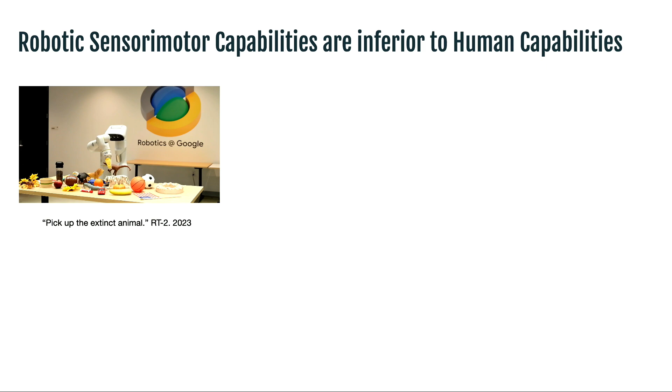But what I want you to pay attention to is actually how simple the grasping action is. It's still a very simple pick and place task. This video is sped up an undefined amount, as you can see by the light flickering in the neck of the robot. This is very simple still, and I think one of the main things we're still lacking in robotics is really not comparable to the kinds of things people can do.

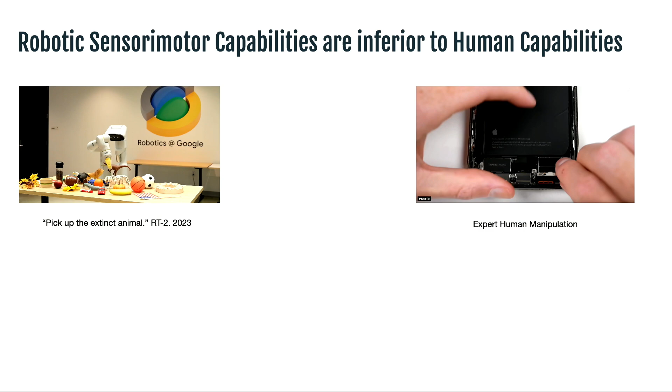Here's a random YouTube video someone sent me of someone repairing an iPhone, trying to take out splintered glass from it. You can see how interesting the manipulation actions of this person are. They are using tools, really prying out things using levers, and there are minuscule screws that this person loosens and all of this. It's a very intricate manipulation problem that we are super far away from solving.

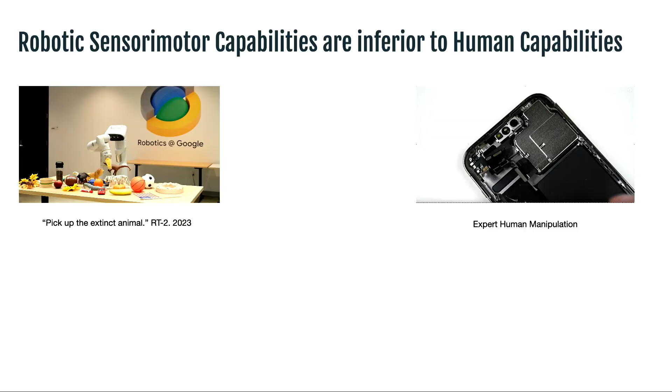Even if we ask a robot to handle comically large tools and comically large screws, I don't think the robot would be able to do it. Here it's even more than that - it's not just tool use, it's also this precision that robots don't have. Robots are not yet able to do this widespread range of everyday human manipulation tasks. This is an expert human, so maybe I'm not even able to do that, but this I would really like a robot to be able to do.

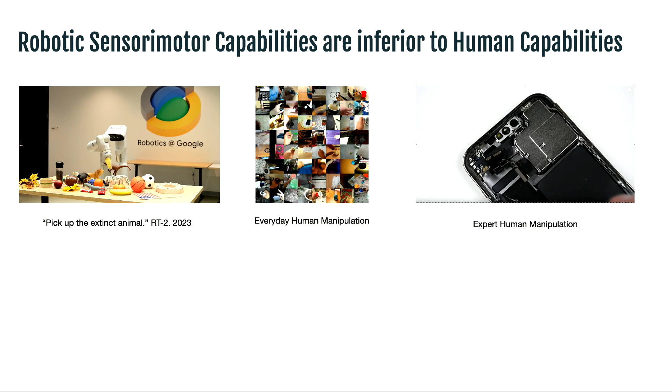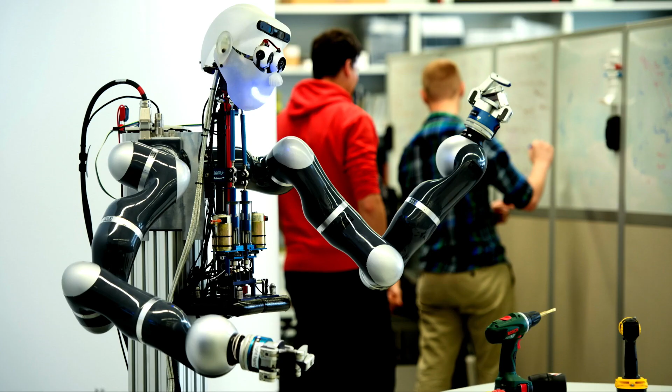A lot of people in the community are asking if we can also have a robotics foundation model that, similarly to NLP and computer vision foundation models, could actually do things they are not necessarily directly trained on, and have zero-shot generalization, especially over different objects, different environments, different embodiments, and of course all these different tasks as well. So what is a robotics foundation model? What exactly would that be?

One way is through dynamics modeling, or how people call it now, world modeling - it's just another term for it. That's a function that takes in actions and past observations and predicts future observations somehow - that's a world model, a dynamics model. Or you could directly learn the policy: take an observation and a goal and output an action directly. These could be ways to implement this foundation model.

Another way is to do inverse reinforcement learning, to learn, given observations and actions, a reward function. Then you have either an optimizer or a reinforcement learning method to learn the policy given this reward function. So what is different between a robotics foundation model implemented in any of these three ways and a foundation model in the area of NLP and computer vision?

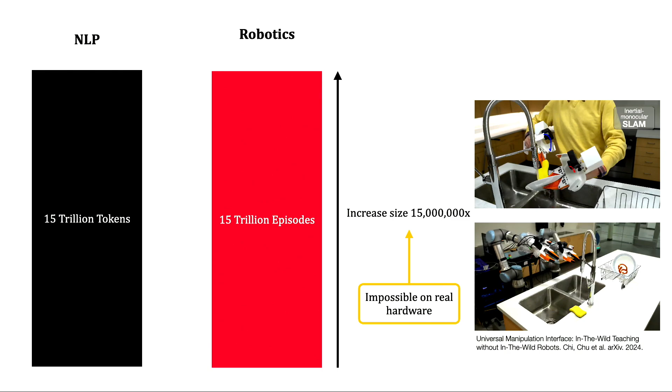I think here's some more ways on how people try to scale up data. Like this, you've probably also seen, this is the universal manipulation interface from Shuran Song's lab, where they have this handheld gripper. And that's, of course, way easier to transport around than a full robot. They basically collect this data, they have this GoPro or iPhone here on the wrist. And then they can train a diffusion policy on it, and then this robot basically tries to do the same thing, in this case, cleaning this plate.

So that could be another way, versions of this on how to scale up this data, because clearly, I think personally, from my experience with this model and trying it, I do think it's very promising to scale up real data in some way.

Which brings me to other ways on how to scale up data. We could, of course, also use simulation, right? I think I had already a bunch of conversations today where people asked me, what do I think about simulation? And personally...

I'm like, every time one of my students touches simulation, everything takes two times as long. And sometimes I'm just like, maybe we should just use a real robot all the time. But I do think simulation has its place, and there's probably a lot of scaling up we can do without spending this painful robot time, and instead spend painful simulation time.

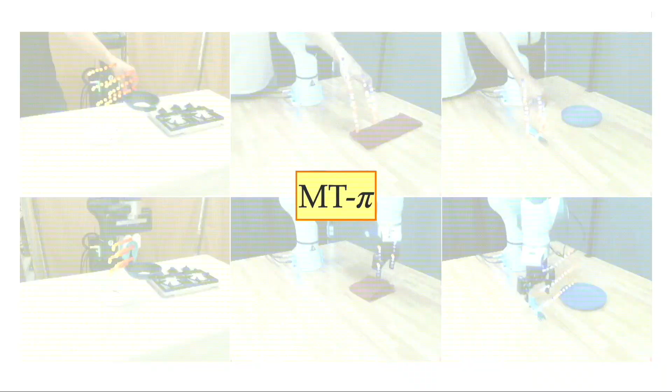Let's start with this first work, called motion tracks. Basically what we do is record a human demonstration, like in the top row there, and then want to reproduce the same task on the robot. The motion tracks are the motion of key points on the human hand that the robot is then supposed to imitate and follow.

The key idea is that these motion tracks of a hand on a 2D image are transferable across these two embodiments. So what do we do at test time? We predict motion tracks from the end effector in an RGB image. In fact, we do it in two images and then triangulate the points into 3D space.

And then we solve for a rigid transform between the current end effector and the predicted point, which can then be used to find the next end effector position.

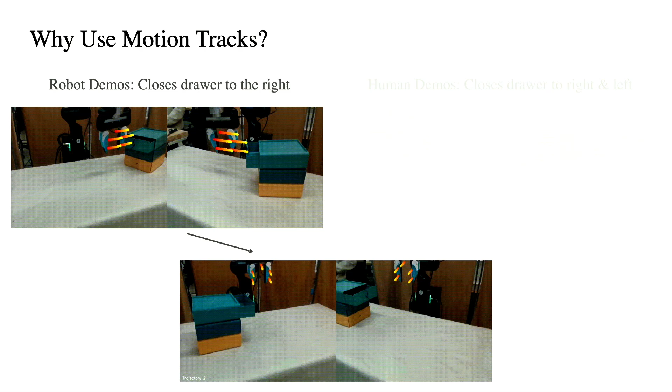So why would you use motion tracks? I think this is true for the two first works, but here's an example we showed. Let's say you have robot demos closing a drawer to the right of the robot, and human demos that contain both closing a drawer on the left of the human and on the right of the human. If you only train a policy on the robot data that only knows how to close a drawer on the right, it won't be able to close a drawer on the left side, because it has never seen it.

Now, if we train on both of these data sources, the robot is actually able to do it on both sides. So this is just a toy example of how, with very few human demos that are easier to collect, and training on both data sources, we can get this bigger diversity.

Yeah, so the human hand looks like a roboticist human hand, you know? Does that matter a lot? Yes. In fact, this will matter - I'll come back to this point for sure.

This is one of the things that is still a limitation in the two first works I'm going to talk about. In both of these works, the human basically has to move in such a way that a robot can actually reproduce it, and the mapping has to be easy between the robot and the human as well, which is still unsatisfactory.

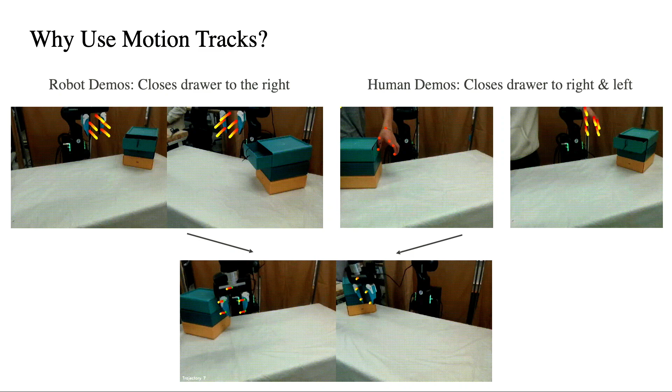But it's the first step. It's still easier to collect data like this than to actually lug around a robot. But the third work is trying to address exactly this.

Let's keep with this work for now. So basically, again, we now have these motion tracks, and this robot - this is an explanation for how things work at test time. We have two cameras seeing this robot from two different angles. These are the images that it sees. Given these images, our policy predicts the motion of these key points.

These are just diffusion policies - a diffusion policy that predicts forward these 5 points in the trajectories. We then triangulate these points, assuming a known extrinsic camera calibration, and solve for the 6 DOF pose. Here's a more geometric visualization of these two viewpoints and how we triangulate and resolve for these robot actions.

Okay, so we are running this in the loop. Here you see this more long horizon task and how the motion tracks are being predicted for a horizon of, I think, 8 actions or something like this.

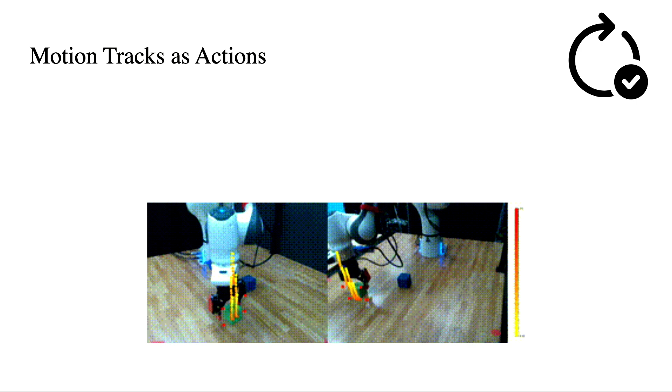But of course, we also want to learn from a human dataset. There, we can record from 2 images, but we don't know the end effector position - we somehow have to extract it. For the robot, we have proprioception, but for a human, we don't have that. And we need to figure out when the human is grasping as well.

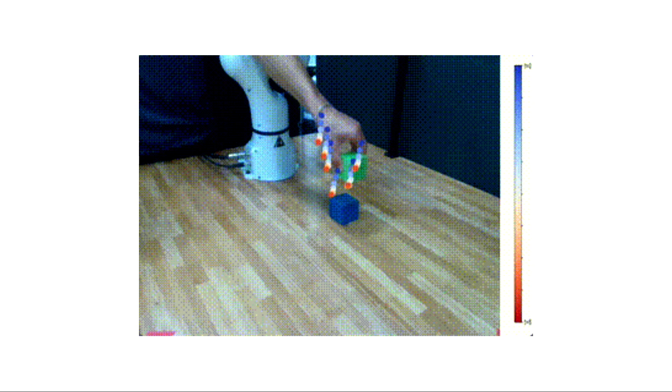So what do we use to actually track this hand? We use HaMeR. Today I learned that actually ARKit on the Apple iPhone is better than HaMeR, which is very good information. So this is kind of how this looks - we basically take these images and it works pretty well as long as there aren't a lot of occlusions and all of this.

And then for detecting when a person is grasping, we use these fingertip positions and some mask of the target object, and there's a simple heuristic to decide when the person is actually grasping. So this is how we get this human dataset labeled in the way we want.

Okay, so just an overview of the method. So now we basically have a little bit of robot data that we get by teleoperation. Then we have this human data that does the same task in the same environment. And both of them have these key points annotated that are corresponding to each other.

So now one problem is that the robot hand is slightly differently shaped than the human hand, even though we make them look like a roboticist's hand. And so we have to actually train a key point retargeting network that kind of disturbs the robot key points and makes them look more noisy, or like human key points.

And then we train this motion prediction network, which is basically a diffusion policy that predicts these tracks in 2D. So we get these tracks out for 2 images, and then we also get a label whether grasping is happening or not.

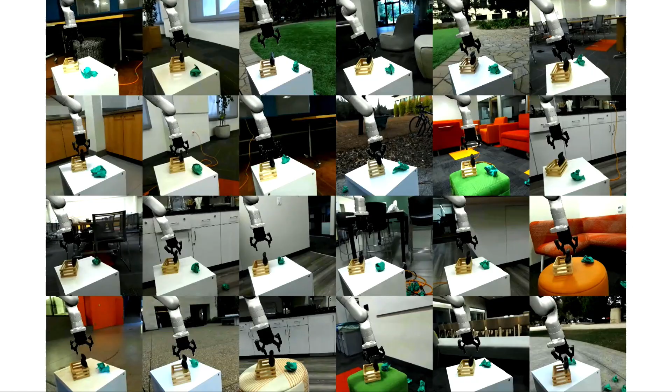Then we can use our knowledge of how the robot we want to use looks like, what the kinematics are, and so on, to actually overlay the virtual robot by establishing correspondence between the human hand and the robot hand. So what we get is an edited dataset that instead of the human hand now has a robot in it. This is how the new training data looks like now.

It's basically the same videos, but with a robot overlaid. If you look very closely, you can see some not so realistic contacts between the robot and the objects, but overall it looks pretty good. If you don't pay a lot of attention, I don't think you'd see that this is not a real robot. The cool thing is you can do it with any robot you may have - you just need to know how that robot looks like.

So now we have this edited dataset, and we can use it to train an imitation learning policy. We just used diffusion policy. Then we tested on the robot where we overlay the virtual robot, which honestly we figured out later is not necessary to do, but it was kind of a safe thing to do before the deadline. Then we run the policy on this.

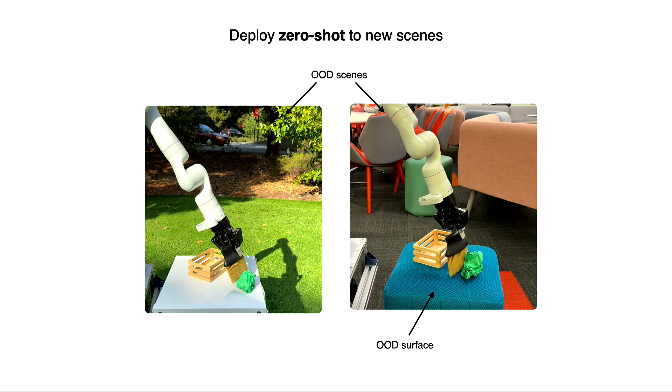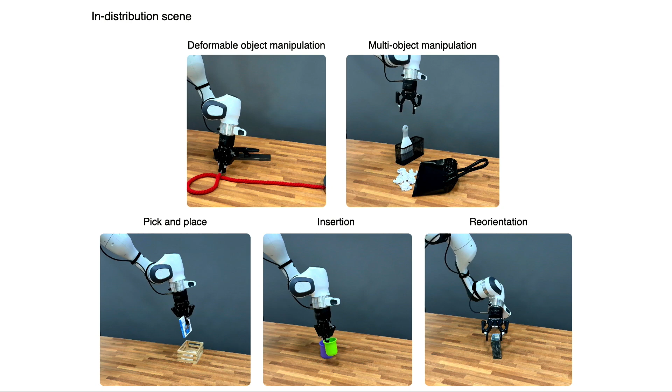Also, this is very fast - this is just rendering on your graphics card. This is how it looks on out of distribution scenes, where it's either a very different surface or outside on the field behind gates, with people eating in the background or cars going around. And here are some of the in-distribution scenes for a task that we collected data for.

Jeannette, what is the success rate of just replay? Of just replay - same scene, just replay. Then we can understand the value of imitation. We haven't done that part. I think replay would be you take one demonstration and then just play it back. That gives us an idea of the fidelity of the demonstration.

And the fidelity of your transfer. So probably if you leave everything the same, like the object in the same place as in the demonstration, it would probably work. But you mentioned sometimes the hand doesn't close, or the arm is in different places. HaMeR error, I see. You want to know this.

Okay, so we did want to know what happens if you train an imitation learning policy on the same amount of robot data, compared to the human data you have. So you have, say, 50 demos collected the way we did it, and 50 demos collected on the robot. We train an imitation learning policy - what's the success rate? The success rate is higher if you only use robot data, because it's still much more precise. Here you are inheriting all the noise from HaMeR, for example, and also the mapping between the human hand and the robot hand.

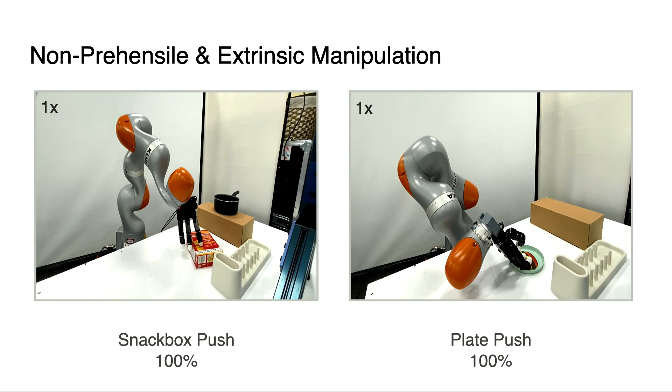Here's this pitcher pouring again, and here's some non-prehensile manipulation tasks as well. One interesting thing is that for this plate push, the robot actually uses its knuckles instead of fingertips, because the Allegro hand has very rubbery fingers with very high friction. If it were to do what the human did and scrape along the table, it would get stuck. So in simulation, it learned to use its knuckles to push this plate. These are examples where it's actually a disadvantage to exactly imitate what a person would do—it's better if the robot learns with its own embodiment how to get the task done.

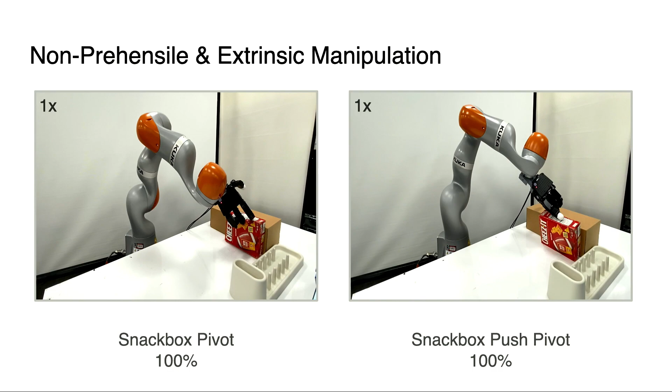Here are some more examples from this non-prehensile extrinsic manipulation. It looks honestly very questionable in my eyes. I have to pay these hands, so I don't know—I'm not sure how much I like what I'm seeing, but they seem to have survived so far.

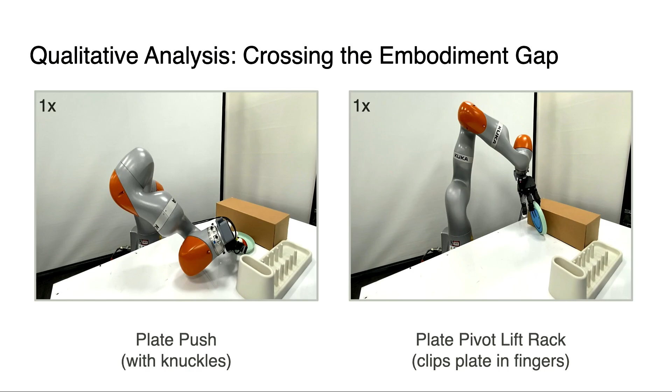Then there are some examples of crossing the embodiment gap. Here's another example with this thin plate where the robot learned to clip the plate between its fingers, because although a person would use their thumb, the thumb of the Allegro hand is kind of weird and doesn't allow it to easily grasp this thin plate. Instead, the robot learns to use two fingers to do it, which is kind of interesting.

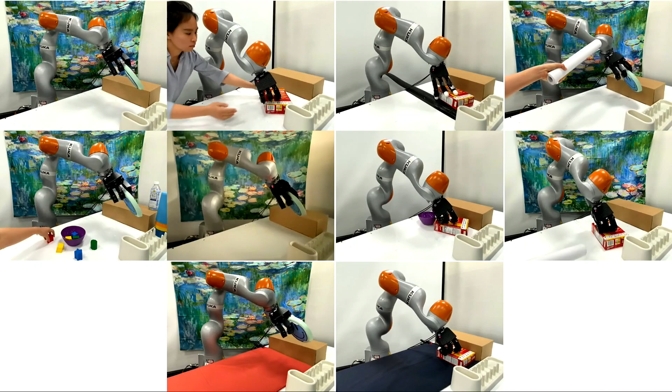It's also pretty robust to different initial positions or when the object leaves its pose. This whole method is also object-centric—we're using FoundationPose again to track the object, so we can use different backgrounds. Olivia here is pushing this plate around, we're turning the light on and off, and there are different surfaces with different friction. None of this matters. One video even had my students take away the screen, revealing the whole messy lab environment. That's the nice advantage of having an object-centric method that tracks objects—you don't care what's going on in the messy background.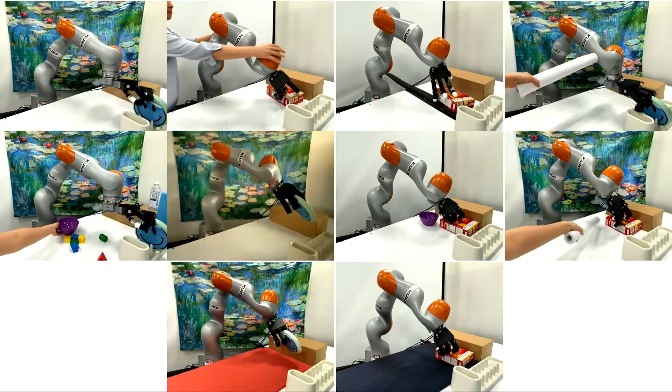We found, of course, a bunch of limitations as well. For example, the insertion angle for this plate was very hard to get right, and there's still a lot of tracking errors. If you rely on an object-centric tracking method, you're also still very limited by the abilities of that method.

In this work, we again learned from humans, but we used human demonstration in a very different way from the other works. We're actually interested in what's happening to the object, and we only get this pre-manipulation pose instead of all the poses along the entire trajectory.

We also don't need robot data, at least no real robot data, which is nice. Specifically nice is that the robot can learn its own strategy. So the person who's doing the demo doesn't have to really do like the robot would do.

But I think what is still very challenging is this step of creating the digital twin and then going from sim to real and all of this. So I'm not sure how scalable this is. I'd love to hear also what others think or what strategies they have with that. But I personally am skeptical if we can do this well enough.

Okay, so these were these three works, and I talked at length just about how we scale up data. And I think this is not all we need to do as roboticists. There's a lot of other things missing beyond just scaling up data collection, and I'm not going to talk in depth about this. I'm just going to give you some examples.